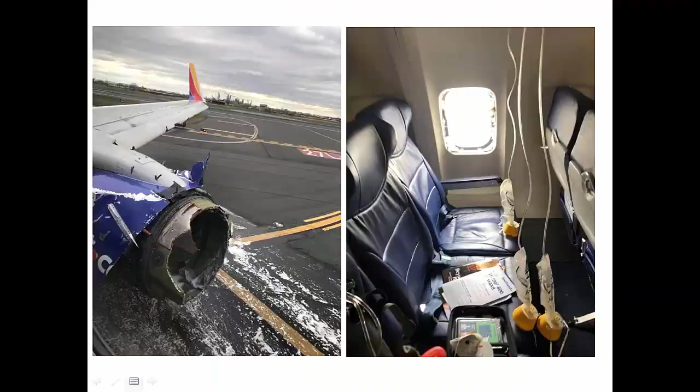It is ironic that I was talking to you about the different airplane accidents that were related to fracture and fatigue in the previous lecture. And yesterday we had this rare, actually the first fatality after 2009, a rare accident in an airplane of Southwest Airlines where there was a failure somewhere in the engine.

So presumably something like a blade from the engine broke, and the containment ring that exists around the engine failed, and there was something from this disaster, this mess, that actually flew away and hit a window in the airplane,

and a passenger was actually killed as she was pulled out of the airplane through the window. It's not that she fell out, but the force, the differential in pressure internally and externally, actually pinned her on the window, and she tragically died.

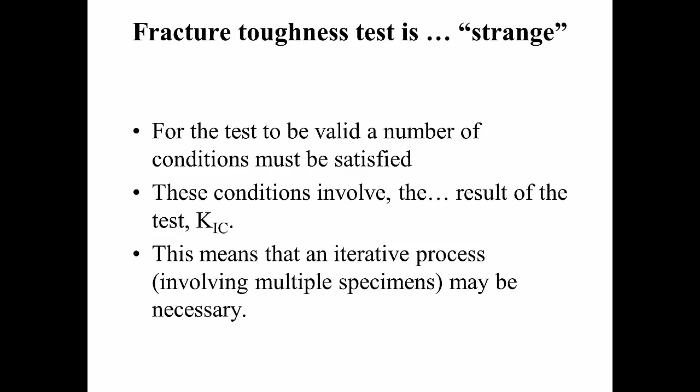So the next thing that we will discuss is how we measure fracture toughness. And I want to say that this is a different test than others that you have seen. It is strange in the sense that for the test to be valid, some conditions need to be satisfied, and these conditions are not known quantitatively a priori. So the conditions involve the result of the test, and that implies an iterative process involving multiple specimens in order to get the right value for the plane strain fracture toughness. So there is an ASTM standard, as with most tests, and the number is shown here in the notes.

There are many different types of tests, and there are many types of tests because, well, first of all, let me tell you that this is the most standard one. It's called the compact test, the compact specimen. It is a square test, essentially has two holes where pins are inserted, and we are loading the specimen in that way. It has a machined start of a crack, but that's not the end of the specimen preparation.

The important part of the specimen actually is an actual crack that propagates at the tip of the machined slot there, and this crack has to be sharp. If that crack is not sharp, then we're going to have problems similar to the ones that are common for the Charpy test. And so we want to make sure that we have a crack that is atomistically sharp.

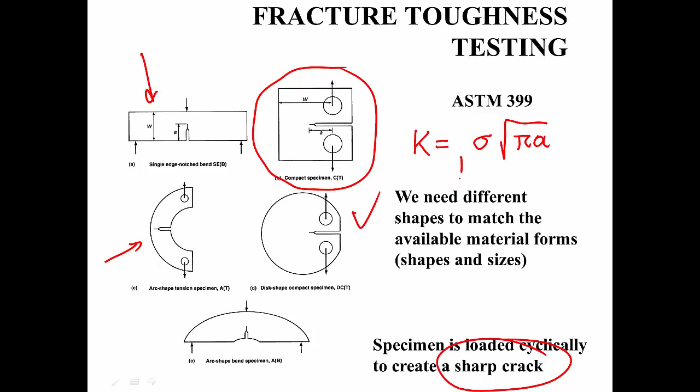In fact, at some point I mentioned to you the possibility of differences in different geometry, and we talked about surface versus internal cracks. And we said that essentially we have a factor here that is added in this formula. And so in general, there is a geometric factor here, called the geometry or shape factor, that can be estimated. There are plenty of resources, books and internet resources, that will give you the shape factor, which sometimes you will see as F and sometimes as Y.

It doesn't really matter. Now you are grown up enough to be able to deal with inconsistent notations from one book to the other, or even from one lecture to the other. And so, practically speaking, there are resources that will tell you exactly what that factor is for different cases.

So, for example, for a problem like this, where you have a surface crack and a finite width: remember, in a lot of the analysis that I talked about earlier on, I was considering a crack that is much smaller than the dimensions of the specimen. But in practice, the dimensions of the specimen are finite, and this can be taken into account. So here you see this relatively complicated but not unreal expression where F sub g is the shape factor. G is the ratio of A to B, where A is the length of the crack and B is the width of this geometry.

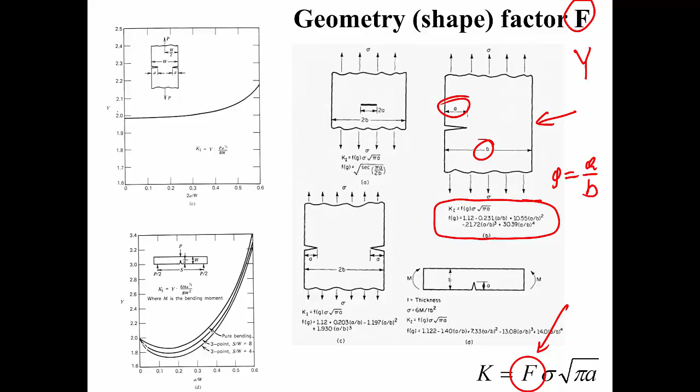So for all these cases, there is a shape factor. If you need it, you find it in the books. It is the job of mechanical engineers and people doing things like finite element analysis to come up with these numbers, and they have done a good job over the years cataloging this. We are just using them. So by knowing the shape factor, it doesn't really matter what the shape of the test specimen is. As long as we know it, we can do the fracture toughness test and get results.

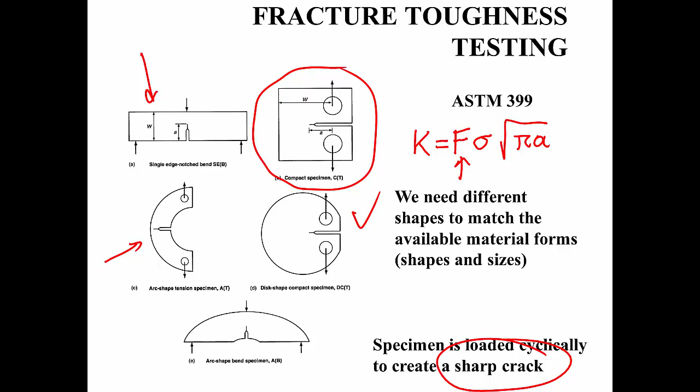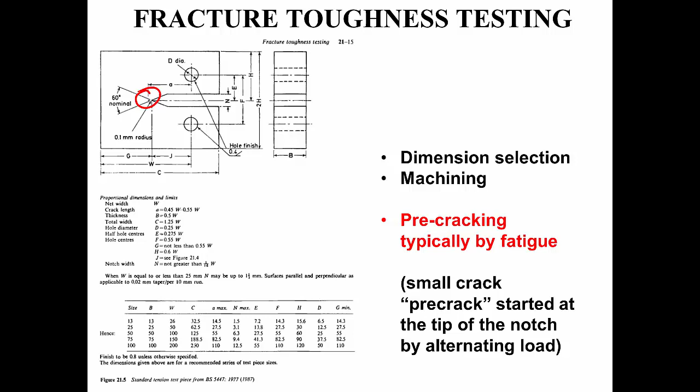So we focus now on the compact specimen, which looks like this, as I mentioned before. You have to choose your dimensions, which is really interesting because you have a choice of a small or a large specimen, and that can play a big role. With respect to pre-cracking and the generation of an atomistically sharp crack at the tip of the notch, we talked about it. I'm not going to repeat it. Let's see now what happens as we test this kind of specimen. What are the possibilities?

So when it comes to testing a fracture toughness specimen, we obtain from the testing machine a plot of the load versus the crosshead displacement. Sometimes, instead of load versus crosshead displacement, it's actually more accurate to plot the load versus what's called the crack mouth displacement. Essentially, your specimen is like this, this is your notch, this is how you're pulling, and this is your crack that propagates there.

Essentially, we have a clip gauge that is mounted at the entrance of that notch, and it follows how this notch opens. It is preferred over the crosshead displacement, which is often altered by things like the compliance of the whole system, and it can create some issues. So let me actually delete the thing. So what we have in this graph is load versus crack mouth displacement.

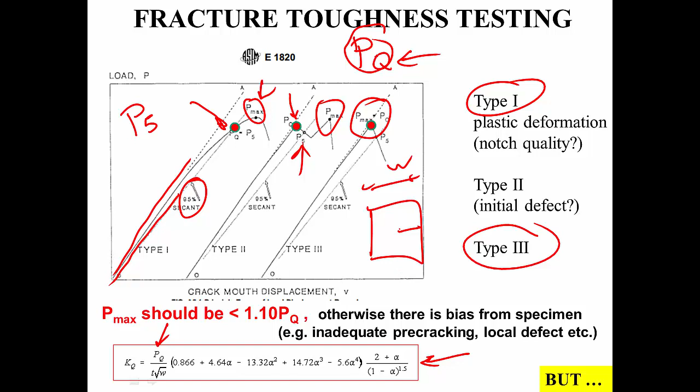In any event, we take that value of the load and we put it in the formula for fracture toughness, and this is a slightly unusual way of writing the equation, but it doesn't really matter. So you have the load here. I believe T is the thickness, W is the width of the specimen. So if it's like this, this is the width, and alpha is actually the crack size.

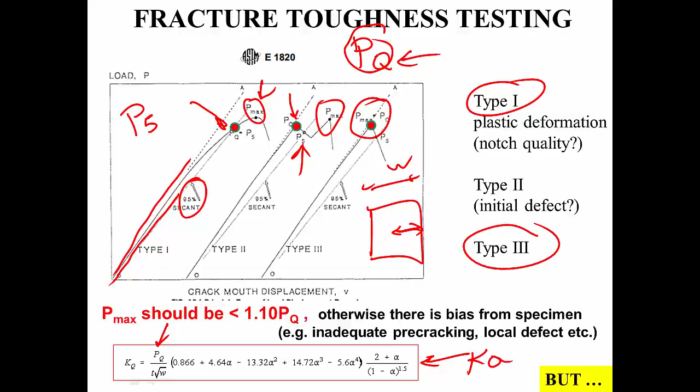You calculate your fracture toughness, but this is really not fracture toughness. It can be, but we need to test for it. So how do we test whether this value is appropriate or not? There are two conditions that need to be satisfied. If these two conditions are satisfied, then we say yes, the value that we calculated is indeed the plane strain fracture toughness of the material. So the first condition is to have plane strain conditions satisfied.

Okay, what does that mean? Plane strain means that the specimen thickness must be large. Okay, how large? The recommendation from ASTM is this one here. So you take the value of the fracture toughness in question that you calculated from the test, you put the yield stress of the material, and you multiply by 2.5. This has units of length, and I don't know if you remember, but actually 1/6 pi or 2 pi, depending on whether you have plane stress or plane strain, times K over sigma y squared was the size of the plastic zone.

So this expression here actually has length dimensions, and if this is smaller than the specimen's thickness, then the plane strain conditions are satisfied. So this expression for plane strain is about 15 times the maximum plastic zone, the plastic zone at failure. So if the thickness is much larger than this value, then ASTM standards say that the plane strain conditions are satisfied.

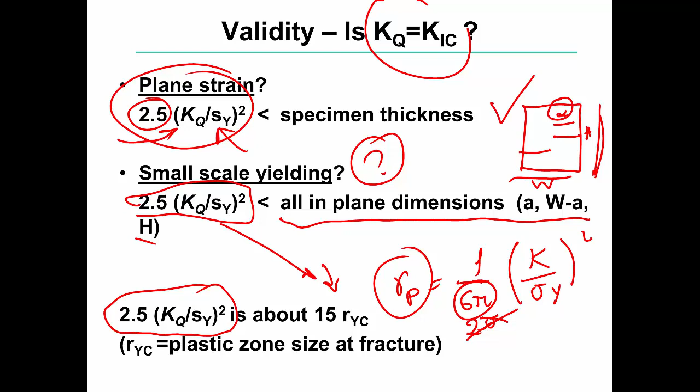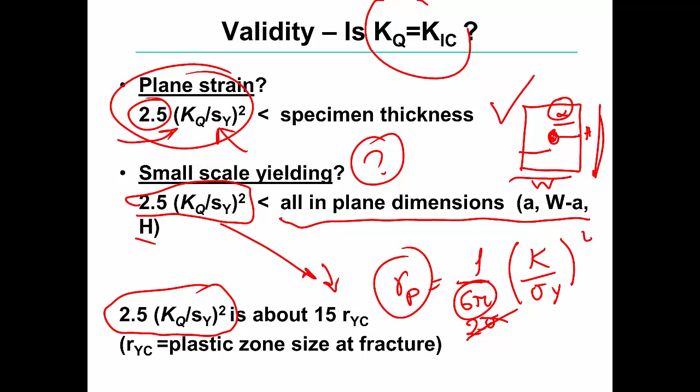But that's not enough. The next condition that we need to test is whether yielding around the crack tip is occurring at a sufficiently small scale. And this is satisfied if the same value, which is proportional to the plastic zone, is smaller than all in-plane dimensions. I remind you that if the specimen is like this, this is my height, this is my width, and this is my crack size. And so essentially these should all be much larger than this expression here. And if that is true, that means the plastic zone at the crack tip is small enough, and that gives full validity together with plane strain to the value of the fracture toughness.

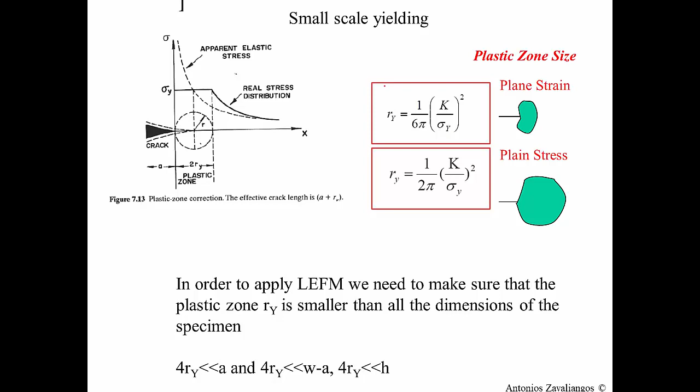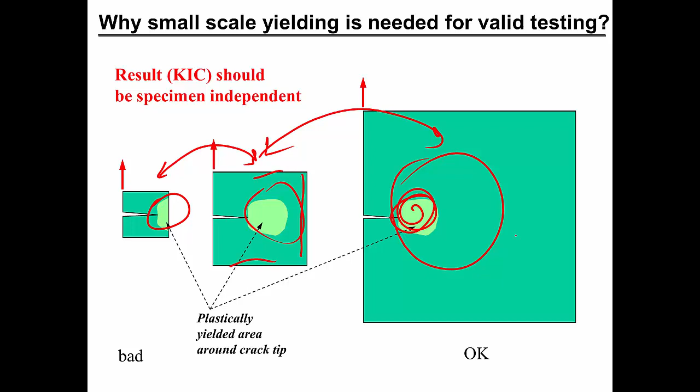These are the equations that I was talking to you about in the previous slide. So why is small-scale yielding needed for valid testing? You can probably see this here in a qualitative argument. So if there is a lot of plastic zone in this range, you can see that this kind of test and this kind of test are really not equivalent. So this one and this one may be equivalent, assuming that the presence of the boundaries does not interfere substantially with the stress field around the crack tip. And this is satisfied when this plastic zone is much smaller than the in-plane dimensions of the specimen. This one, this one, this one, and that one. Okay? So we want this plastic zone not to interfere with the boundaries of the specimen.

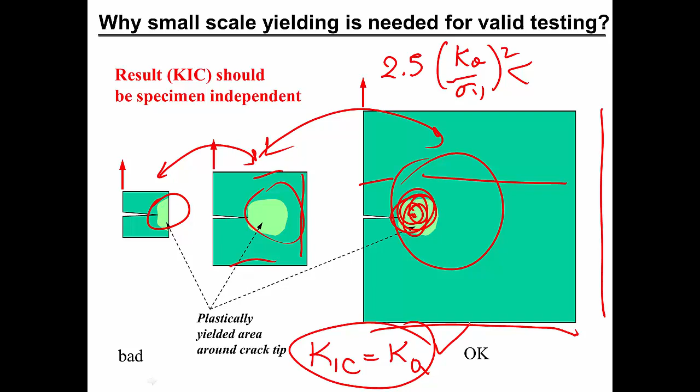And this is satisfied when that formula, 2.5 times KQ over sigma y squared, is smaller than all these dimensions. Okay, so that's exactly the set of conditions, and if everything is satisfied, then we have a valid measurement for the fracture toughness, and what we calculated is exactly the value of the plane strain fracture toughness of the material. If it's not, well, you need to test again.

So, in summary, you need a sharp crack, which we usually do by prefatiguing the specimen. You need some conditions for the load, and in particular, we are interested in the case where you may have multiple failures indicated by peaks in the load opening displacement. As long as the first peak and the main peak are not different by more than 10%, then it's okay. If it's not, there is something wrong. There is an indication of some problem in the specimen.

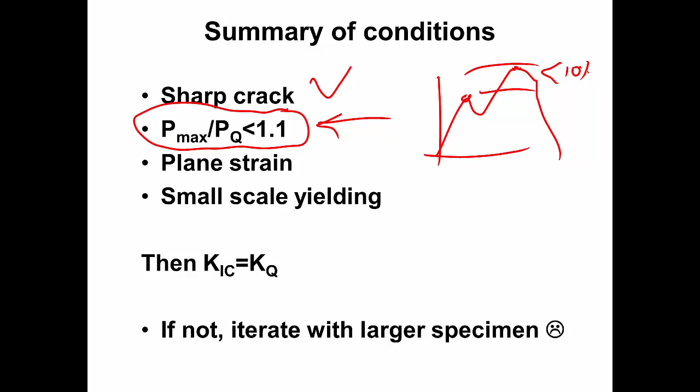Plane strain has to be satisfied. Small scale yielding has to be satisfied, and this puts a constraint on the thickness, and this puts a constraint on the overall dimensions of the specimen. So as I said, if all these are satisfied, we got a number. If not, then we need a larger specimen. Larger either in thickness if plane strain is not satisfied, or the overall dimensions of the specimen if small scale yielding is not satisfied. Or a better preparation of the specimen if some of the other conditions are violated. So it's a very tricky test that requires iterations if your initial measurements are coming from a specimen that does not really have the right size.